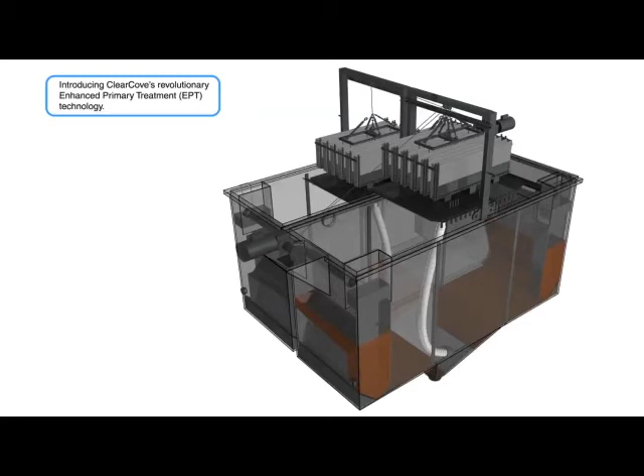Welcome to ClearCove's revolutionary enhanced primary treatment technology. Over the next 10 minutes, we're going to explore how ClearCove is radically changing not only new plant design, but also the retrofit of existing wastewater treatment plants.

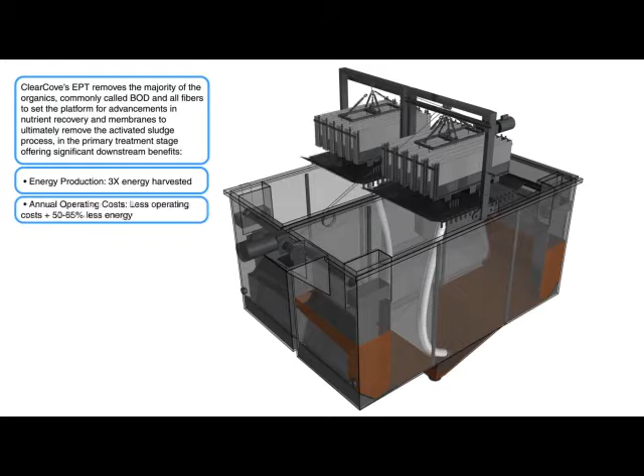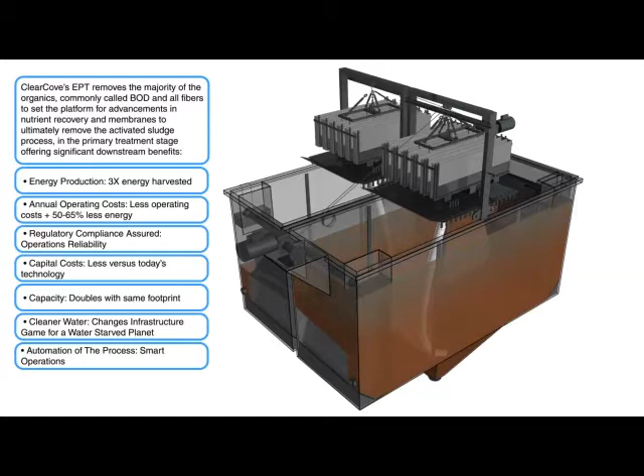At a high level, there are a number of benefits provided with the ClearCove technology. We're able to harvest 3 times the amount of energy compared to today's processes. On the secondary process, we're able to reduce those costs by 50%. We're able to do this at a capital cost lower than today's processes and technology, and we're able to double the capacity of a plant within the same footprint, ultimately resulting in cleaner water and automation from start to finish from an operational perspective.

Now let's take a look at the individual tank of the ClearCove technology to see what actually goes on inside the tank. What we'll see initially is that the wastewater, or influent, enters from both sides of the tank into the grit section of what we call the influent feed system. We control all velocities coming into the tank, which creates the best design condition to remove the BOD solids.

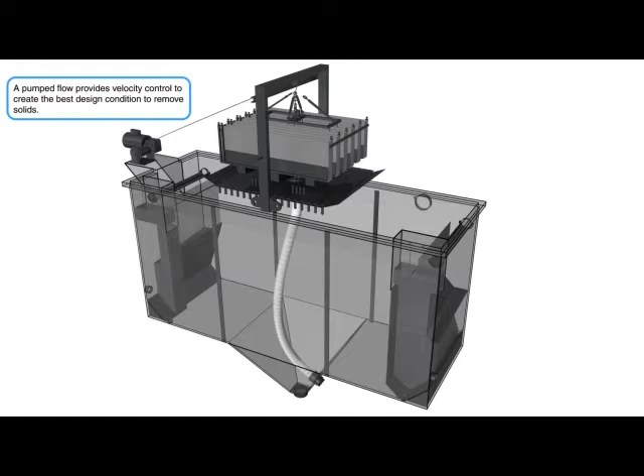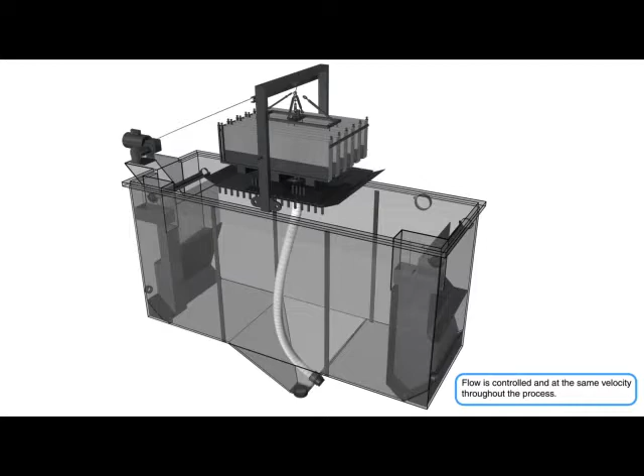The influent feed system is bolted onto the face of either rectangular or circular tanks, creating a very modular approach when compared to common construction costs with concrete formwork. The flow and organic loading are controlled at all times by ClearCove's SCADA control, allowing us to tailor the needs for each facility and also controlling the flow in and out of the ClearCove system.

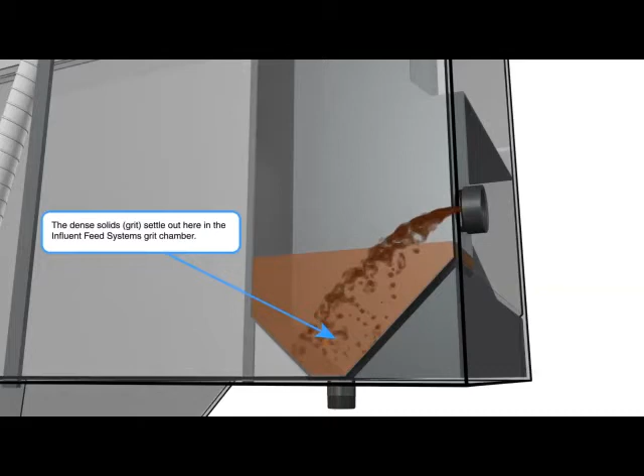As the influent enters into the IFS, the gross and dense solids and grit settle out. How we achieve that level is that the EPA recommends a rise rate of 0.16 feet per second, while ClearCove achieves 0.12 feet per second.

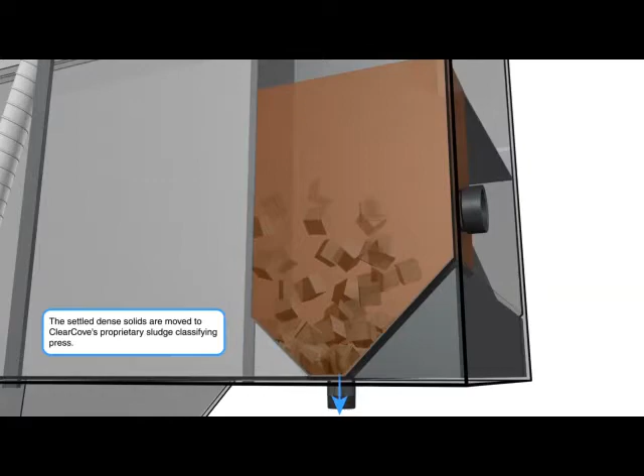We will show later in the process how these gross and dense solids will be moved to ClearCove's proprietary sludge classifying press, extracting 100% of all hairs and fibers. Now the wastewater, minus the heavy solids and grit, makes several 90-degree turns, which helps dissipate the pumping energy.

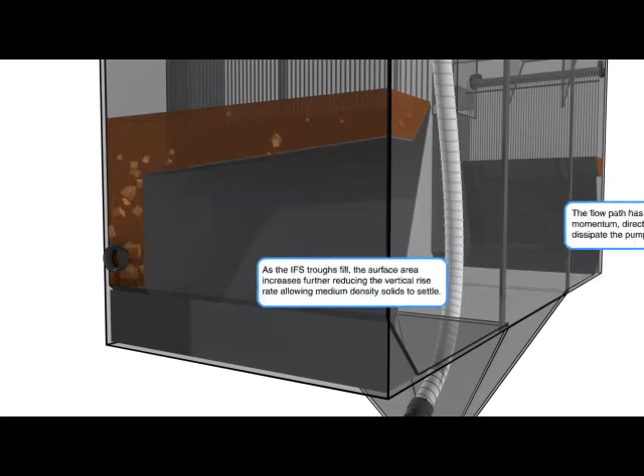As the IFS continues to fill, the surface area increases, further reducing the vertical rise rate, allowing medium density solids to settle out. The beauty of the IFS is that it replaces traditional grit and bar screen in the traditional process while providing in-vessel classification of solids.

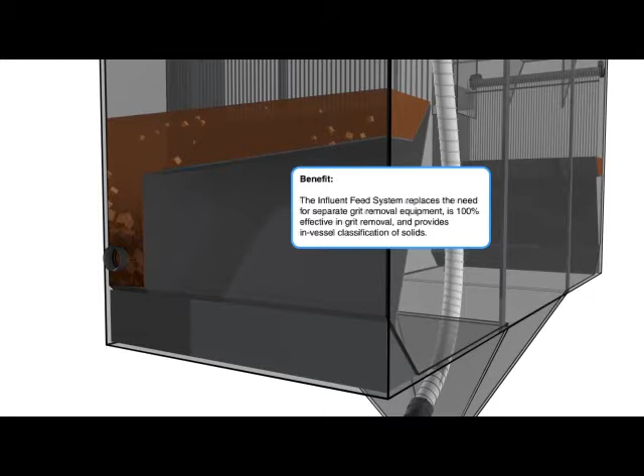Now the wastewater, minus the heavy and medium density solids, makes one last 90-degree turn to further reduce the inertia in forward flow up and over the weir into the main chamber.

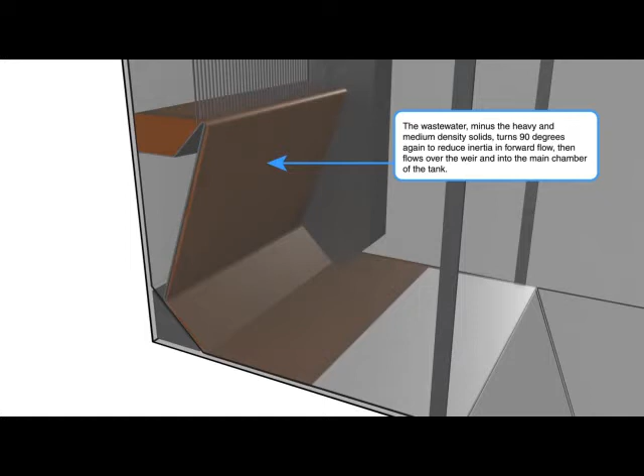With the addition of an optional bar rack, large floatables and rags are contained within the IFS to be simply removed and sent through the sludge classifying press and disposed of properly.

Wastewater now flows over the weir at exactly a 70-degree angle, promoting surface tension as well as cohesion and eliminating any chance of waterfall effect and air entrapment as a result.

Now the densest, medium, and large solids remain in the IFS, while only the lightest, naturally buoyant organic solids enter into the main settling area.

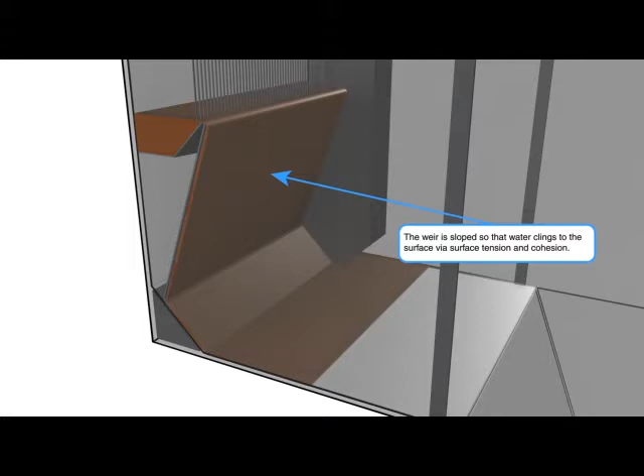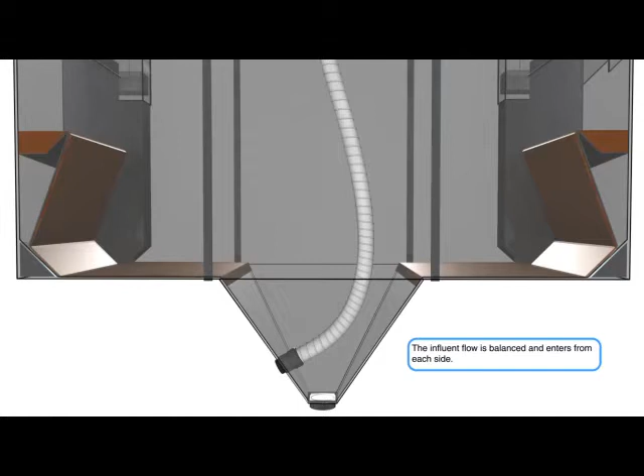Now the wastewater continues to make its way towards the center of the tank from a balanced approach from either side. You can now observe that the gravitational acceleration of the influent down the inclined face of the feed trough will scour the bottom of the tank and move the light, fluffy organics to the center.

As these flows come together in the center of the tank, a resulting turbulence occurs, which is a great platform for mixing chemicals and solids while dissipating the horizontal velocities. One of the other features of the system is there's no mechanical equipment in contact with the wastewater at any time.

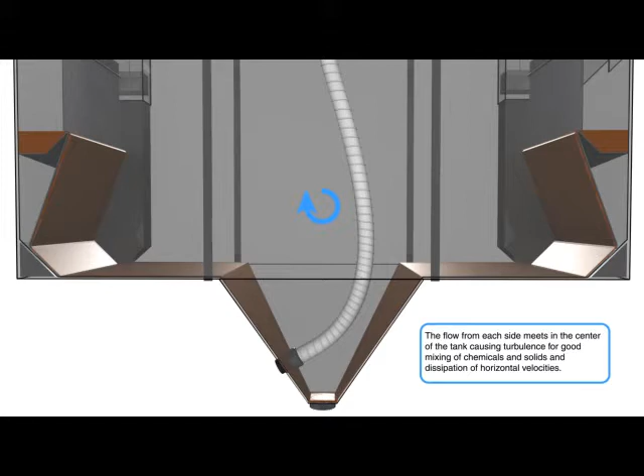Now as the liquid level rises above the weir, the vertical currents and velocities begin to dissipate as the liquid moves horizontally towards the center of the tank and the mass increases. This now begins a relatively undisturbed settling of the solids. You'll notice the rise rate is significantly reduced by the increased surface area of the tank itself.

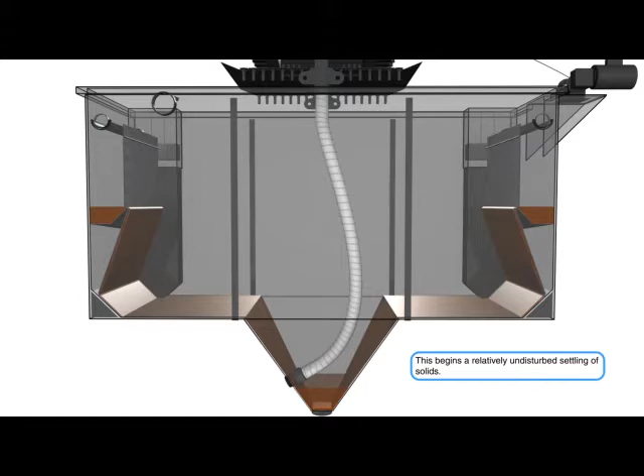The rise rate is now 0.02 feet per second. By stopping this flow in the tank, we're allowing the settling of the light, fluffy organics. Now during this time, there is no liquid exiting the tank being filled.

Conventional clarifiers have a continuous flow from the inlet to the effluent weirs. By stopping the velocity of the wastewater, this allows for the light, highly organic solid removal.

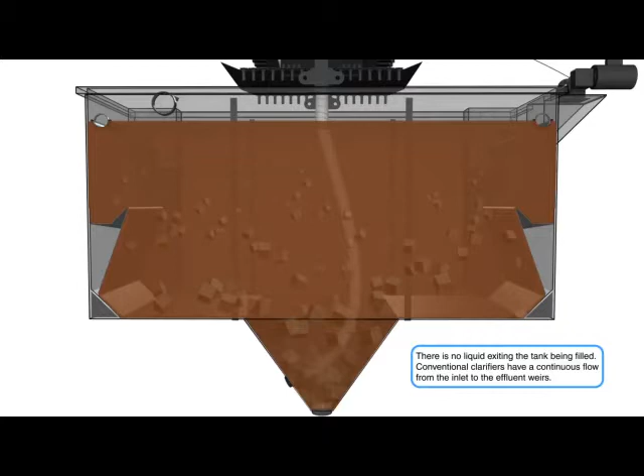Scum, oil, and fats are removed from the surface of the water by raising the liquid level above the scum troughs at either end of the tank.

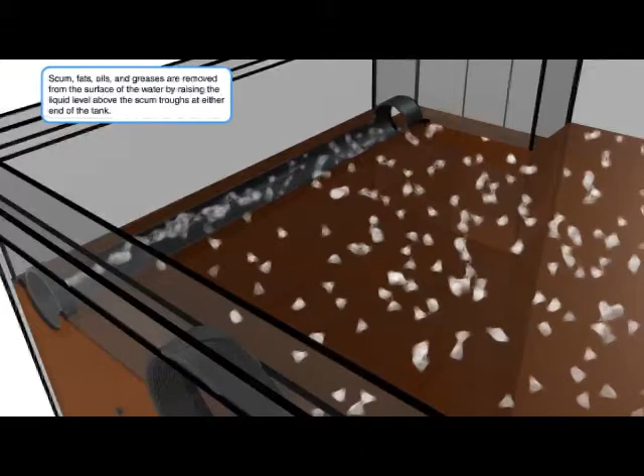As that trough collects floatables, a valve connecting that trough to the adjacent tank that has finished decanting, thus having a lower liquid level, is now open, allowing those floatables to be captured in a scum basket.

The scum basket can be lined with a bag or simply emptied into a container for disposal after several days of collecting floatables. Finally, a simple flap valve is placed at the end to trap floatables in the basket.

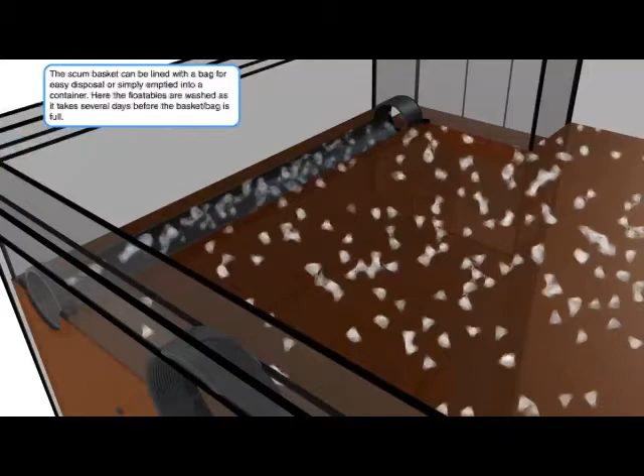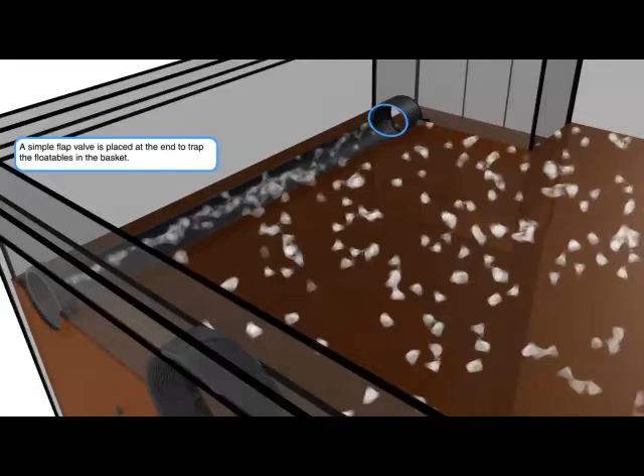Now that the tank is filled, an optional settling period occurs, tuned to the specific needs of each plant. The volume of the plant is based on the peak hourly projected volume for storm events, providing surplus volume for average daily flows, thus allowing a rest period.

This settling period will be dependent on the rate of flow entering the facility as well as the desired level of BOD removal. This settling period will also allow for the high-value organic material to settle to the bottom of the tank where it will be removed.

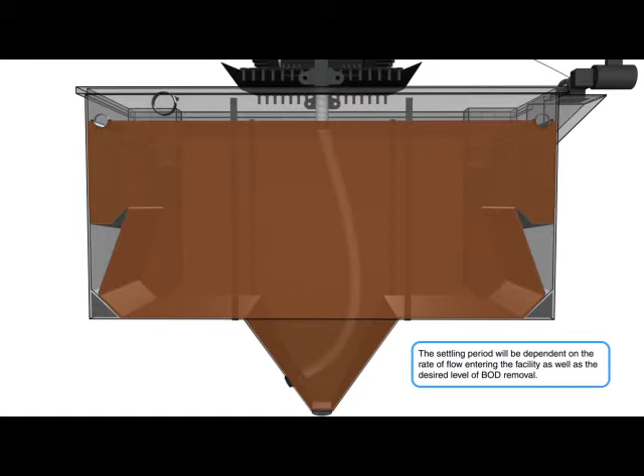Now as settling continues, a stratification occurs in the tank with low, medium, and high BOD, with a concentration of the highest BOD at the bottom.

Now let's move our attention to our screen box. The screen box is made up of 50 micron stainless steel screen. The system controls velocities at the screen liquid interface level, controlling and preventing the screen from fouling.

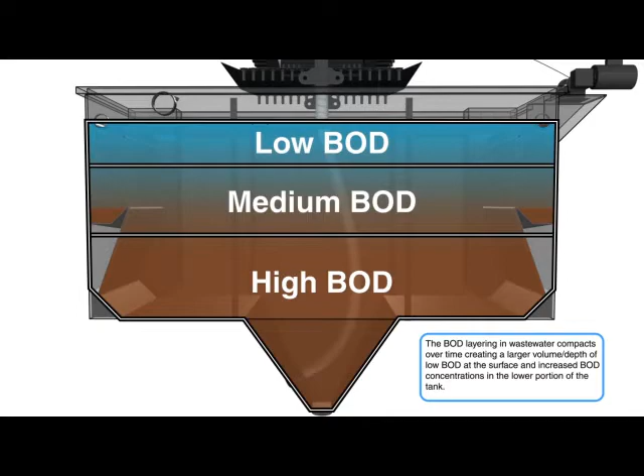As the screen box is decanted into the tank, an air scour turns on, deflecting fibers and FOG away from the screen. A backwashing also occurs.

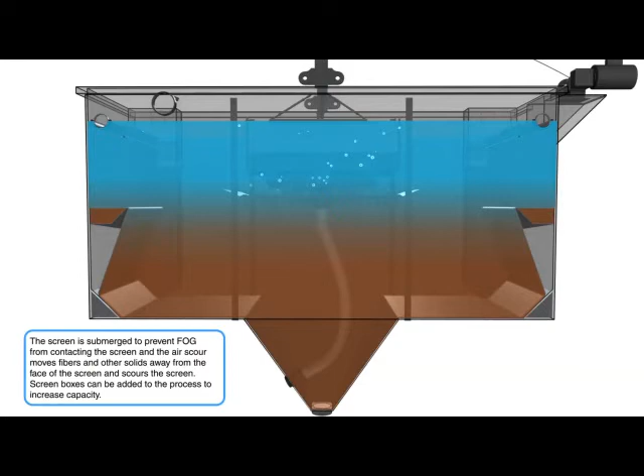So the immediate benefit of the ClearCove system is that it removes all fouling fibers and solids, increasing the overall efficiency and life of the downstream process at the low BOD and TSS supernate level of the tank.

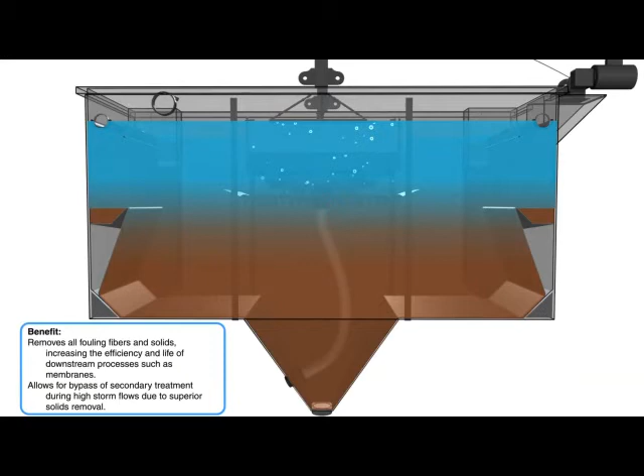This is achieved by lowering the decant box at the same rate as the liquid level, keeping the currents primarily horizontal. Now you can see that we've separated the tank into three areas.

First, the gross solids and grit go to the sludge classifying press. The effluent goes to the secondary process, being reduced by 65%, and the light fluffy organics move on to the anaerobic digester.

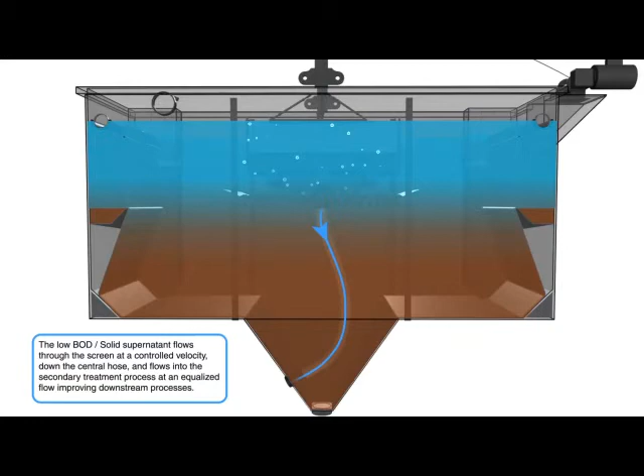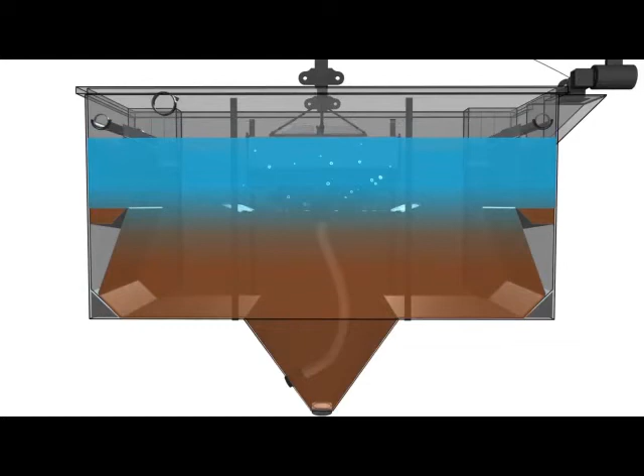The IFS can now get rid of the gross and dense solids and move them on to ClearCove's proprietary sludge press. The feed troughs and grit box solids are flushed out periodically from fluid from the adjacent tank.

When the IFS has completed its draining cycle, the high-value organics in the main chamber of the tank are now removed from the port at the bottom of the sludge hopper.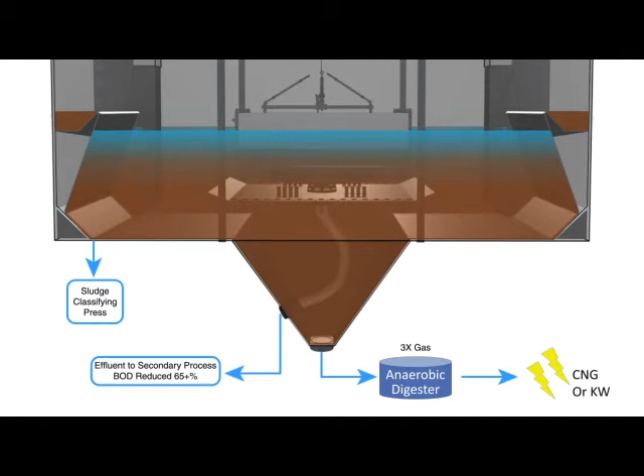The ClearCove EPT solution always will include 2 or more tanks and will size accordingly to the plant size. While one tank is filling, one tank is discharging. This allows for enhanced settling to occur because one tank can settle as the other fills.

As we move to the summary page of the ClearCove Enhanced Primary, we see how ClearCove is focusing on changing wastewater treatment now and in the future.